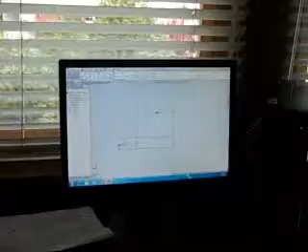Yeah, like a piece of wood. So this is called Smart Dimensions. You can basically put in whatever number you want, but it normally goes by inches. You can put in centimeters or anything else, and it'll convert it.

Wow, I keep forgetting how it'll convert it back to inches. You have to change your dimension type in the bottom, go to the left-hand corner options, or bottom right-hand corner. Oh no, you can just type it in, 50 cm, and hit enter, and it'll make it 50 cm, but it'll say it's 19.69 inches.

Okay, so if you look here, my drawing has been fully dimensioned, and it's turned black now. So if I change things, it's fixed in this location right now, and it'll change things according to how I fixed it. So if you leave it blue, wacky things may happen when you start moving things, so you should always make sure it's black before you start making it 3D. So when it's in 2D, make sure it's black before you move on.

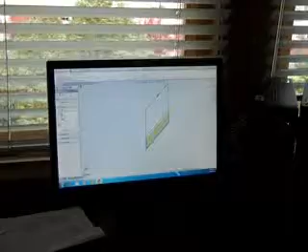A true 2x4 goes 16, or sorry, 8. Now you have a 5-foot 2x4. And you hit done, which is right there. Up or down?

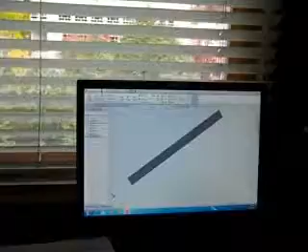Oh, by the way, if you press down the middle key, you can move around, rotate your view. And if you hold control in the middle, it slides in. And if you roll the ball, it'll zoom, zoom wherever your arrow is going to be the center of the zoom.

Oh, what was that? This is your feature. You can pick the side you want, or the angle you want to look at it from. This one? Yep, that one. Oh yeah, up in the top right. Plug in, there you go. You can pick from the sphere how you want it to be.

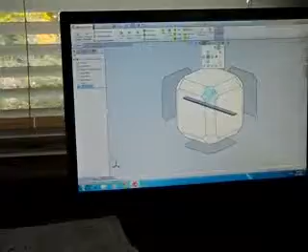Is that new? That was my last year. I was gonna say, I didn't use that last year. So there's your, wow, yeah, that's awesome.

That's convenient, very convenient. Alright, so now you must save this piece as whatever you want to save it as. Let's just say part 1. See, I had all these other parts from last year. Don't they get deleted at the end of the year? I don't know, or is that on your file?

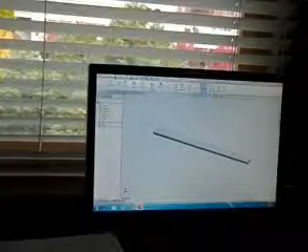And then you have to open up a new assembly, and we'll just bring in 2 of the same parts. Yeah, and make them, and insert component. There, now we have 2 of the same parts on one view.

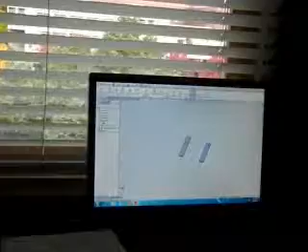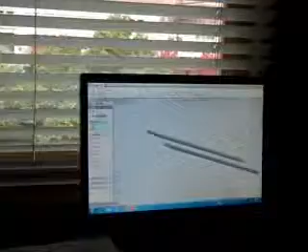Alright, so now we get to mate, which is this little paper clip right here, which is where all the fun comes in. So you can mate in many different ways: parallel, perpendicular, coincident, tangent, tons of different fun stuff. But for now, most likely it'll turn into parallel, but you click the two surfaces that you want to mate. So let's go back, let's move back.

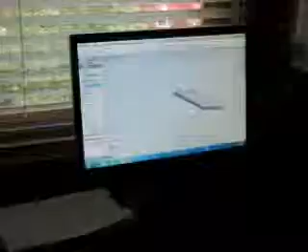So I click one of these walls, wow, too close, and then another one, and they slide together for me, which is really nice. You have to mate in multiple spots in order to get it flush, or locked. Okay, then mate at least 3. You have to constrain it, and it's not just any 3, you have to constrain it in the X, the Y, and the Z. And if you're not sure if it's constrained, you can grab it and move it around, and if it moves, you haven't fully constrained it.

Unless you want it to move, like if it's a wheel, you might want it to spin. So you're not going to fully constrain it. Oh, I'm still in mate, that's why. There we go, now I can.

Actually, I can't move it. Which is what she was talking about, the wacky stuff happens. Yeah, and sometimes it'll just randomly flip it and spin it and do weird things.

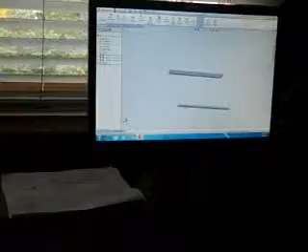Control Z. Okay, apparently I have another part on here too. That's a little bit weird. Did I accidentally move these? Because that turned when I moved it. See how it's doing that?

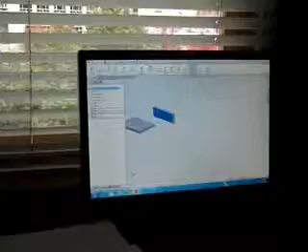SolidWorks tries to think smart, so you kind of have to watch it. Alright, so I can see right here, over here at least, move this down, or not, whatever. Let's open up mates, so there's my mates, and you can see where everything is.

So apparently, via this mate, I have these two edges stuck together. So let's get rid of that one. Yes, now I can move this without it wigging out.

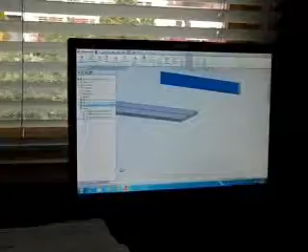But if I wanted to... hold on, let's get rid of all of these and we'll make like a box. So, okay, before he does it, if you have a part open and an assembly open, you can take your part and drag it over there. Why didn't I teach us this? So much easier, you can drag it over there.

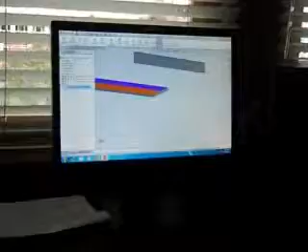You can also do, they have a thing called Smart Mate, and sometimes it'll try to—you can drag it over where you want it to mate when you drag it in, and it'll try to guess how it should be mated.

Oh, that's my original, so let's get rid of that. And we'll insert another part.

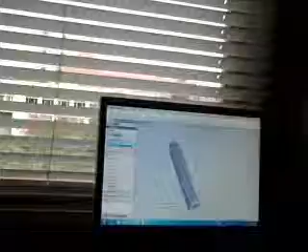Alright, that onto that. Enter. Oh yeah, if you hit enter while you're trying to mate stuff, it'll just finish it by itself. Yeah, it can also do some stupid stuff like close your program if you're on the wrong thing.

So if you see here, I can move this, I can spin it, because I haven't constrained it. So that's one way to check if you've constrained it right—you want to see if it moves and if it spins.

So right now, all I've done is said that these two holes should be lined up. That's all I have right now.

Let's say I want to make it... yeah, or aluminum or whatever you want it to be.

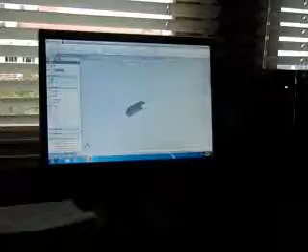Are you going to mate the two circles together? Alright, again. Oh, she's just a step ahead of you, that's why it spins. Okay, so now it just spins.

So then to make it not spin, anybody have a guess on how we would make it not spin? Constrain it how? Where should I constrain? Two adjoining faces—which ones?

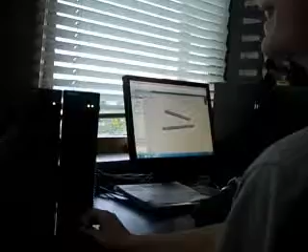If we want it to lock up, so I've told the holes they need to be in the same... parallel, same axes, yeah. And then I've also told it that these two beams should be a certain distance apart.

So now it spins, so this one spins. So how can I make it not spin? What do you guys think? Like the two smallest sides line up. So make the two ends line up?

Okay, so I'm going to zoom in here. You can get to really, really small dimensions, like this. Come over here and I'll say this face.

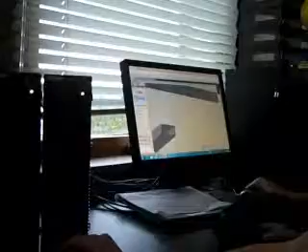That's how instant it is. I want to let me do this. It should have worked. What I hated when I started doing this is you scroll up to go out—oh yeah, I got lost so bad—and you scroll in.

Isn't there like a center button? Oh, is it? Maybe, yeah, it's in the view panel. Make it parallel. Yeah, yeah, like, there you go, because it says coincident. There you go, nice.

And if it lined up the wrong sides, you can have it flip them. Right now it's doing opposites, and here it does same. Okay, so now that I say okay, I can grab it and it won't do anything. Okay, so that's how I know I've been successful.

This is how you figure out where you want your bolts, where you have to drill, because we would have to drill this hole out with one of the drills we have over there, and we don't want to have to drill 3 holes in one spot to get one bit in. It'll make it inaccurate and very unstable for us.